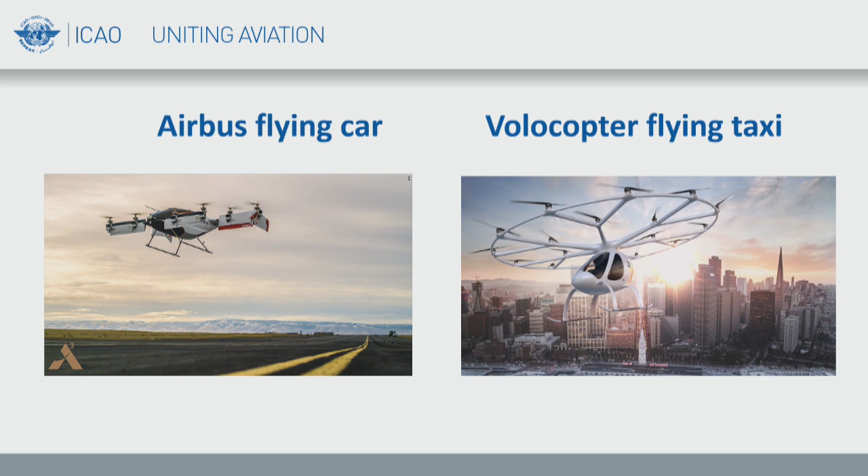Advances are being made in this field in different regions that you've certainly heard of. Remember that the primary objective is always safety in aviation.

Now, in order to attain safety, and aviation has an extremely good track record at safety, we need to look at what we're talking about when addressing unmanned aircraft. What is meant by unmanned aircraft? Well, I'm sure you've witnessed the use in the general public or in the media of a number of terms, perhaps sometimes in an inconsistent, interchangeable way, such as UAVs, UAS, drones, RPA, RPAS, and so on and so forth. These terms are used in a way that is not necessarily consistent, and what we're trying to do is introduce some consistency. So first, a few basic definitions.

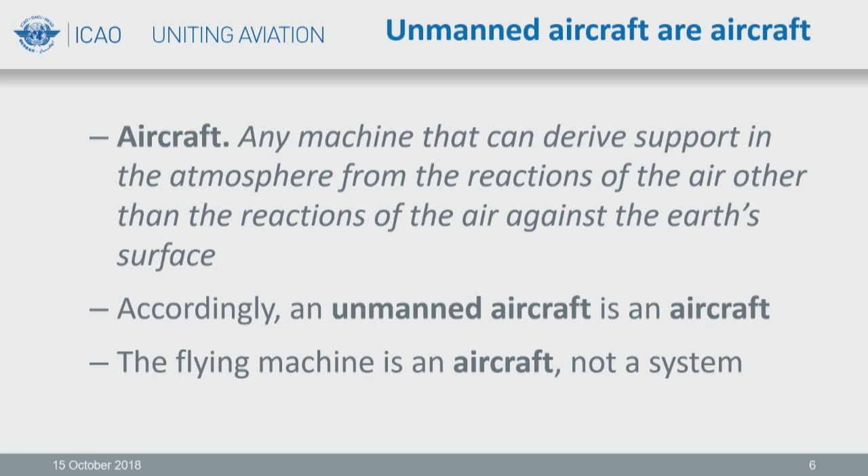An unmanned aircraft is indeed an aircraft. An aircraft is defined as a machine that can derive support in the atmosphere from the reactions of the air, other than the reactions of the air against the Earth's surface. Which means that any machine that matches that definition is an aircraft. And that is true whether it is manned or unmanned, whether you are talking about small drones for delivery, recreational purposes, or inspections, or used as a flying taxi. It applies whether these aircraft are used with a pilot or without a pilot, or using high levels of automation. It applies whether passengers are carried or no passengers are carried. And these developments and these aircraft, of course, involve both traditional and innovative aviation technologies.

Now, going further into the definitions and the clarification of terms, I find it useful to make the distinction between unmanned aircraft versus RPA, because these terms are often used interchangeably, as I said. You have the broader group of unmanned aircraft, and there are four different categories. The first one is free balloons, usually used for meteorological purposes. Second, model aircraft that are essentially used for recreational purposes. Third is what is called RPA, remotely piloted aircraft. And these are highly complex aircraft that are piloted from remote locations by licensed aviation professionals.

A remotely piloted aircraft system, an RPAS, is a system composed of different things. First, an RPA, which is the aircraft, the flying machine, remotely piloted aircraft. A remote pilot station, RPS, which can be on the ground, at sea, or in another aircraft, but remotely from the aircraft. You also need a C2 link, a data link between the RPA and the RPS for control and management of the flight, as well as other components as specified in the type design.

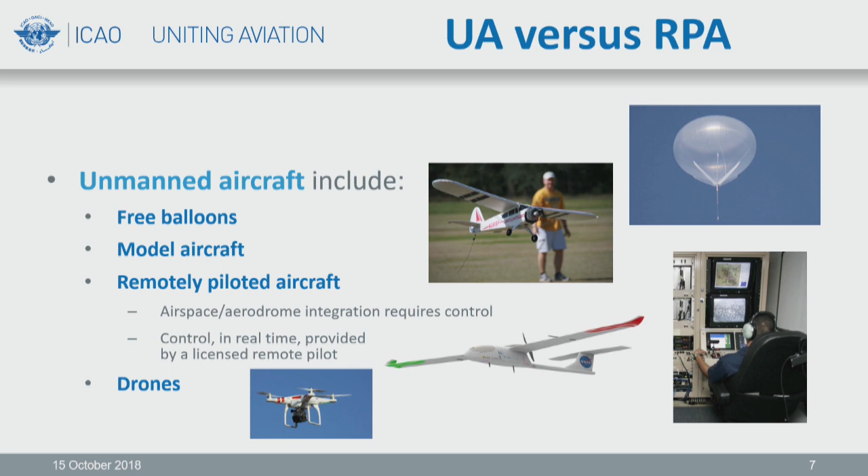The fourth category, commonly referred to as drones, is the one of a much smaller size and weight, and we will go into some detail about that shortly. This is another way to look at the general category.

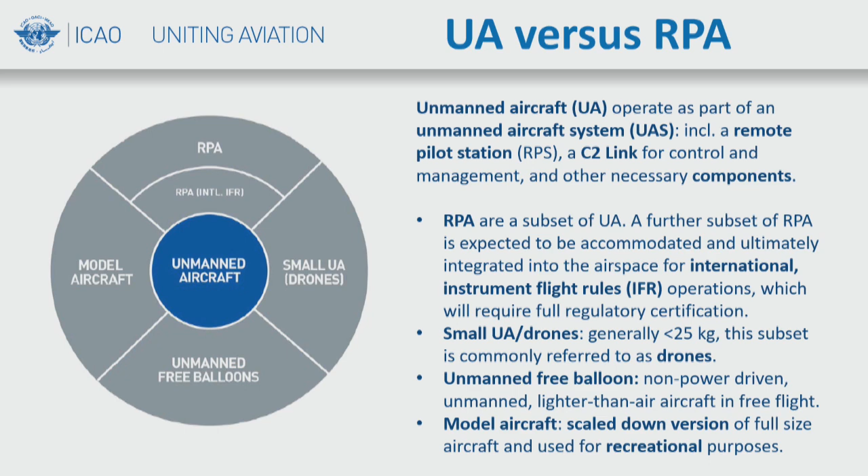As well as the other categories described here: the small unmanned aircraft, commonly referred to as drones, generally less than 25 kilograms, as well as unmanned free balloons and model aircraft.

Now, we have clarified the difference between remotely piloted aircraft, RPA, on the one hand, and other unmanned aircraft on the other. In terms of work being done at ICAO to address the regulatory framework for these operations, there is the Remotely Piloted Aircraft Systems Panel, the RPAS Panel, which addresses the full regulatory approach for fully certificated aircraft versus other unmanned aircraft. The RPAS panel serves as the focal point and coordinator at ICAO for RPAS-related work, and its aim is to ensure interoperability and harmonization.

Very important to remember that the panel's work is focused on international IFR operations. The panel also develops guidance material to support and guide the regulatory process.

Regarding the other stream of activity, the ICAO Assembly in 2016 asked ICAO to take a leadership role in the development of standards and guidance for the harmonization of regulations on other unmanned aircraft that remain outside the scope of international IFR operations. In order to facilitate this expansion of ICAO's work program, an innovative and flexible approach was recognized as necessary.

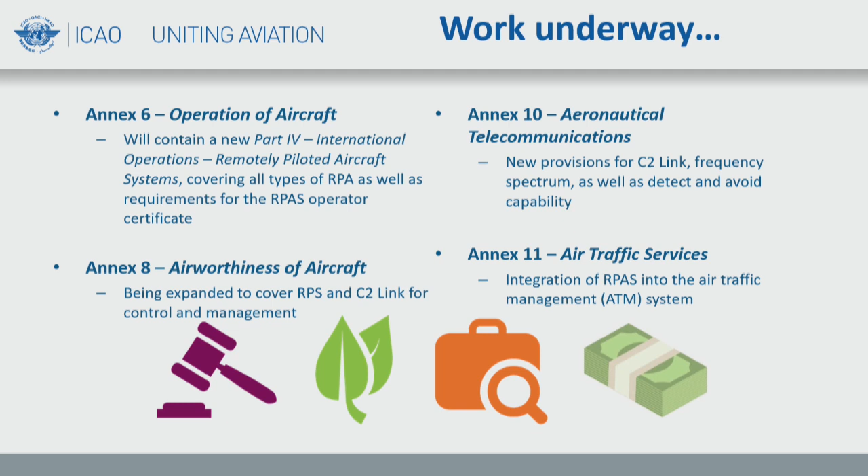Mitigation of cybersecurity threats is also a very important aspect, which is addressed at ICAO. One challenge is insufficient data, and that applies to all these aspects. There is limited feedback because it's such a nascent and highly developing industry that the data, the return of experience from the industry is still in the process of being collected. That is a challenge for regulators because there is no such thing as a huge repository of operational and regulatory experience that is used and that exists

for regular manned aviation. Also, another aspect to be mentioned very briefly is the management of frequency spectrum. Frequency spectrum is a rare, scarce natural resource, and the work is being done under the auspices of the International Telecommunication Union in that respect.

Other annexes impacted by unmanned aviation: Annex 17 on security, Annex 18 to be amended to address RPA employed to carry dangerous goods, as well as Annex 19 on safety management, which is being extended to certified categories of RPAS operations.

In a nutshell, unmanned aviation, in order to be safely integrated into the aviation system, requires the adaptation of all the annexes to the Chicago Convention. The task is considerable, and it is being addressed at the ICAO level.

Now, a quick word on other unmanned aircraft. We just talked about the certificated end of unmanned aircraft, those that are to conduct international IFR operations. Just to talk briefly about a range of emerging activities taking place at a very low altitude, essentially in urban and suburban environments. The increasing numbers of these aircraft, both manned and unmanned, that are and will be operating in metropolitan areas require new approaches to air traffic management.

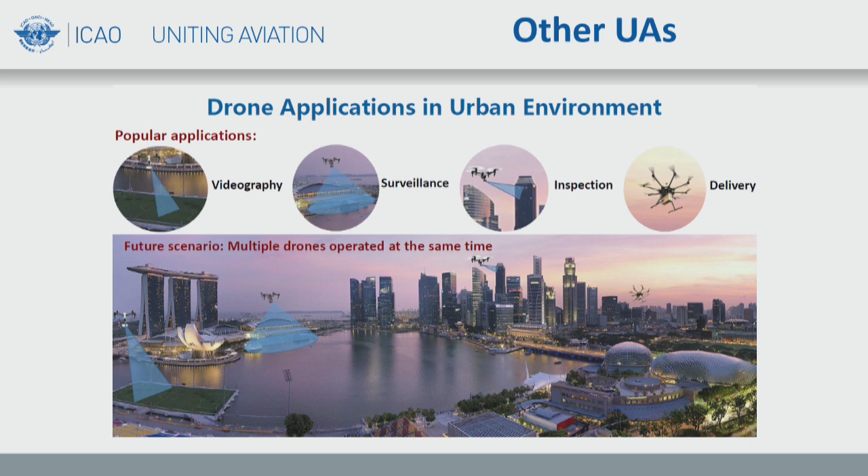The UAS traffic management concept can be defined as a system that provides traffic management through the integration of humans, information, technology, and facilities supported by air, ground, and/or space-based communications, navigation, and surveillance. Any framework for what is called the UTM will need to include several key components.

First of which, registration system. Second, communication systems for the control of the unmanned aircraft. Third aspect, geofencing-like systems, for instance restricted areas or controlled areas where unmanned aircraft should not enter for safety purposes.

Now, just one major difference of the UTM with existing air traffic management is that instead of the traditional voice data exchange between pilot and air traffic controllers, it is expected that the communication and coordination in the UTM will take place through distributed networks of highly automated systems.

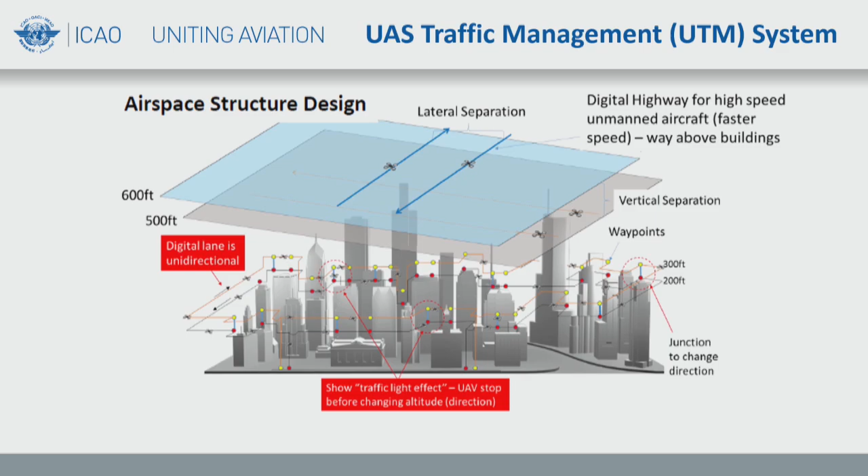It should also be noted that the airspace between the surface and 1,000 feet above ground level is already the operational environment of other users, such as low-flying helicopters, which also will need to be integrated into the UTM system. So identifying the infrastructure requirements for this system will require active cooperation of states, stakeholders, and potentially innovative mechanisms associating the private and public sectors.

Just now wrapping up on this presentation, time is running, and in closing, I would like to emphasize a few things here. ICAO will continue to work for the integration of remotely piloted aircraft into the airspace, as well as on the harmonization and implementation of regulations on UAS.

We are and we will keep working on solutions for the UTM, possibly through mechanisms associating, of course, regulators as well as the industry. What is key is to keep collecting and providing technical data on RPAS operations.

It's also very important that states share information on what is happening at very low altitude, particularly on the operations taking place there and on the way these operations are regulated or at least approached. And very important as well, that's something we take seriously: ICAO will keep continuing its activities to share knowledge, raise awareness, and conduct educational activities, and therefore fulfill its role as the global forum and facilitator for unmanned aviation.